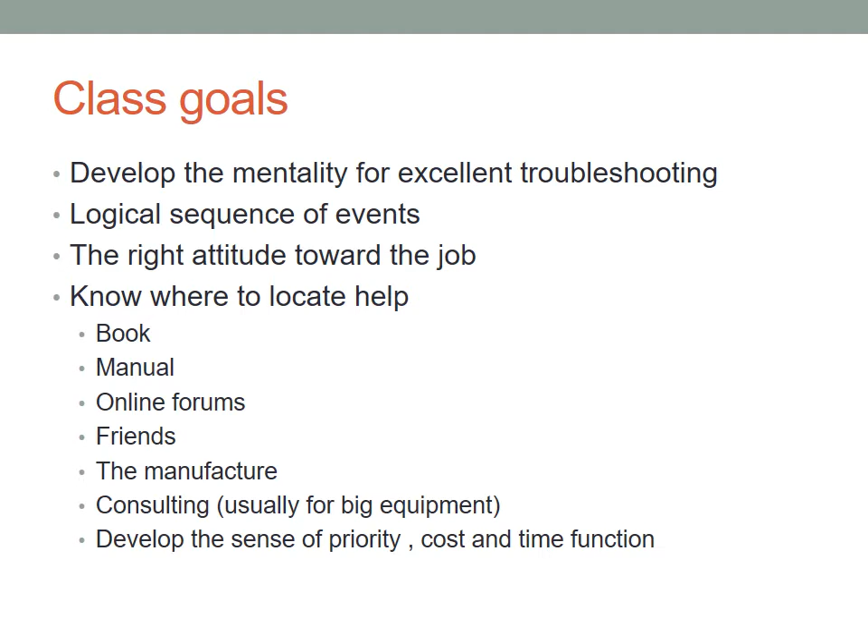Again, we have to develop a sense of priority, cost and time function. Like, do I want to spend the whole day trying to figure out this problem by myself, or do I need to ask somebody, or should I replace the entire thing, or what needs to be replaced? So it's good to develop this kind of skill to know which goes first and how much time I'm going to spend on that boiler and what are the other jobs waiting for me to do.

So troubleshooting. First of all, as you saw in the video I posted on Blackboard, you start with interviewing the customer. What happened, when did the problem start, when was the last time the boiler was running, and so on. The more information you obtain from the customer, the more you will know about the equipment. What is the problem? Did it start? Does it start and stop? Is it giving enough heat? So based on the problem, we can try to zoom in on the problem.

When did it start? When was the last oil delivery? You'll find a lot of problems happen after an oil delivery, and that's because the oil could be not up to specification. There could be a problem with air bubbles in the pump. Was the boiler running while they were filling the tank? That also can lead you to some clues.

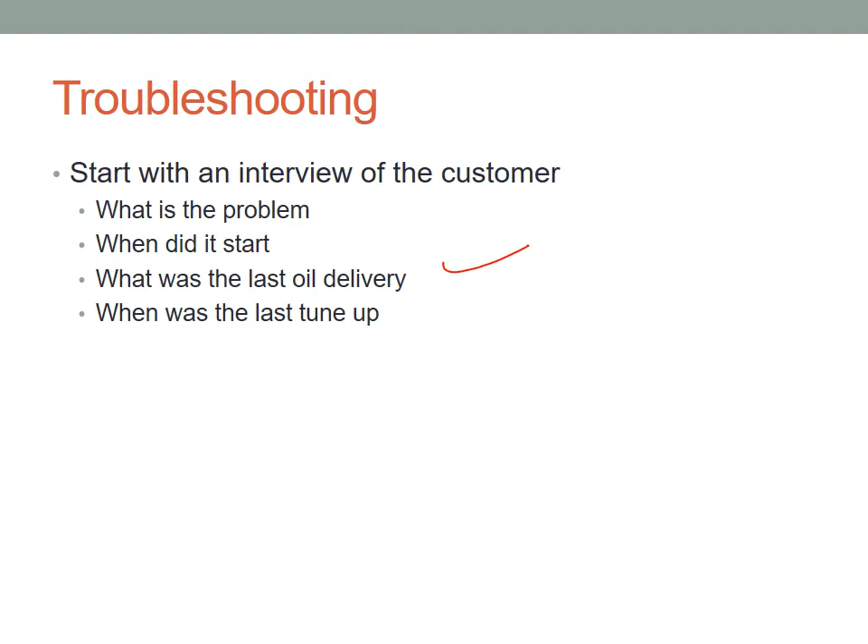When was the last tune-up? Usually there is a checklist next to the boiler that tells you when it was last serviced, what happened to it, what was the combustion efficiency, and so on. So that will be a good piece of information that you want to have before you start troubleshooting. When was the last service call and why? What was the problem? What was changed? And what did we fix?

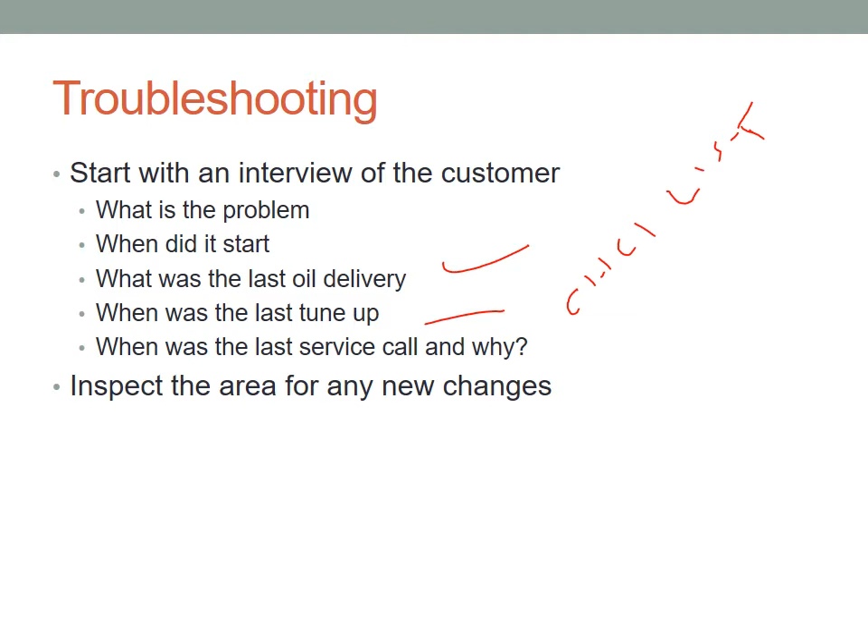Inspect the area for new changes. What happened? Did they put a new boiler there? Did something change? Did they change the laundry, the washing machine and dryer, or put a new opening in the basement? These questions will help you a lot to find what the problem is. Okay, so we'll start with a checkup. So are all the switches on?

So we'll go and check the switches, make sure the emergency switch is on, and we have continuity, and we know how to test continuity. Test the fuse. So is the fuse okay? And again, we can check the fuse for continuity and make sure actually it's connecting.

Then we'll check the thermostat. We can jumper the thermostat and see if the equipment starts or not. And also you can check if the thermostat is responding or not. You can set the temperature high and measure the continuity and see if the thermostat is functioning the way it's supposed to.

Check there's oil in the tank. Many times it will be the simplest things. There is no oil. So check that there's oil in the tank. Check the blower motor door. If it's a forced air system, make sure the blower motor door is closed. Check if it's a hot water system. Check if there's water in the system.

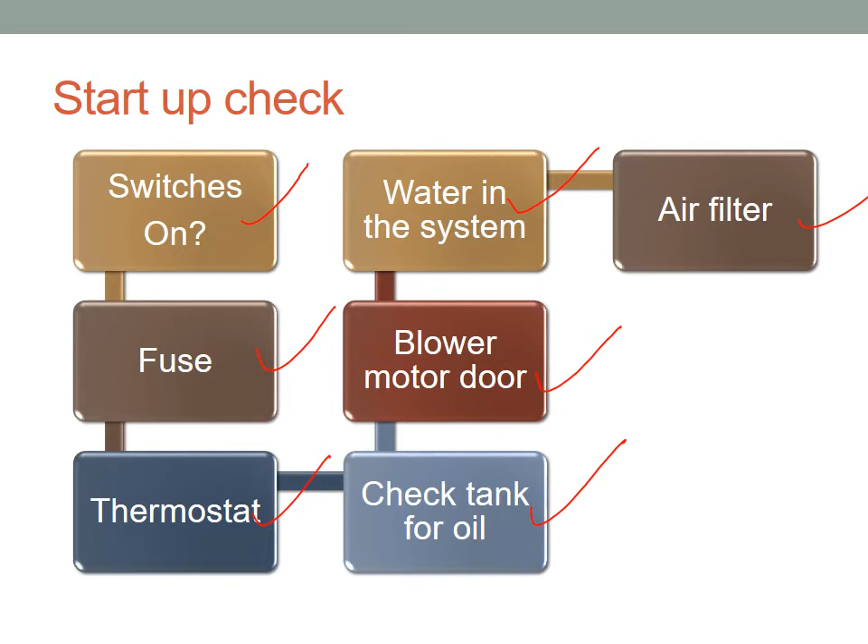If there is no water, there will be air, and if it's air, it's not going to conduct temperature from the boiler all the way to the radiator. And also check the air filter for forced air system in case it's clogged. So this is the basic checkup you can do before you start anything. Check for these things.

Typical problems. So these are some of the most typical problems we can see. First one is no heat at all. I'm getting no heat. The customer turned on the thermostat. There is no heat. It could be not enough heat. It's not heating enough. It's not reaching temperature. The boiler or the furnace is running the whole time and it's not heating.

Or there is too much temperature. It's too hot too quickly. That's another issue we can check and see what's happening. There is no hot water. So if we have an auxiliary water system which is heated by the boiler and we're getting no hot water, we can check the boiler and we can check also the connection between the tank and the boiler.

So check for water leaks. Water leaks are an issue and also a typical problem. So we can go and check and see if the piping is leaking or there is some kind of soldering issue. Check for oil leaks, that's one of the problems. If we have an oil leak, you have to go and check where the oil is coming from. Fix the problem by redoing the piping and also pressure testing the system.

There's odor and smoke. This is very important and it's a very common problem, especially with furnaces and hot air systems, because it means the heat exchanger could be broken. It means that we're mixing combustion air with the circulating air. Also, the thermostat is not responding, or it needs to be reprogrammed, especially with the new thermostats. So these are some of the common problems we can have in our heating system. Okay, moving on.

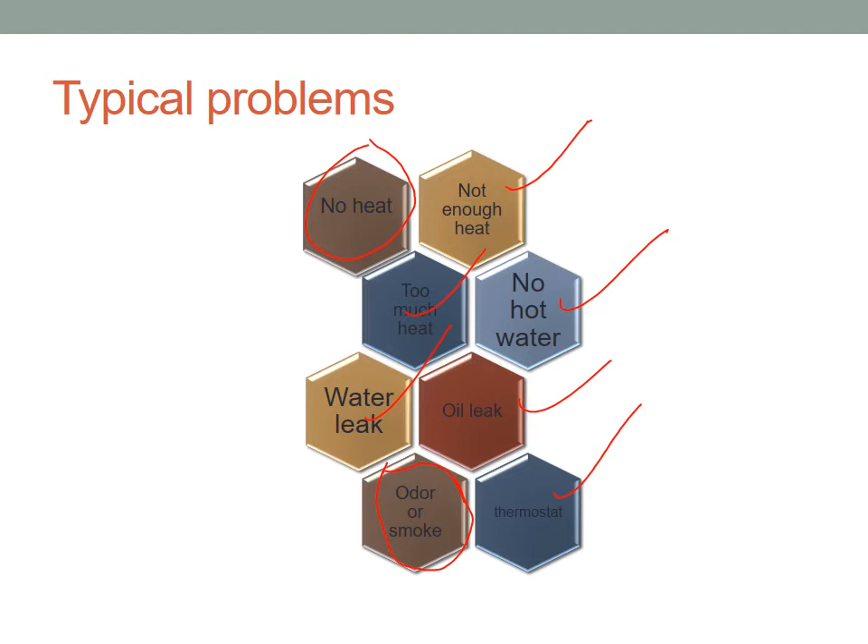Again, the same thing we did when we did wiring of a boiler or a furnace in the lab. We want to locate our equipment. Look for your primary control. Where is it? That's what controls the burner, which is the same as the cad control. If you don't have a primary, if you have a cad control, check for the cad control. Sometimes it could be the aquastat. The aquastat could be controlling the boiler. So check for the primary being aquastat or cad control.

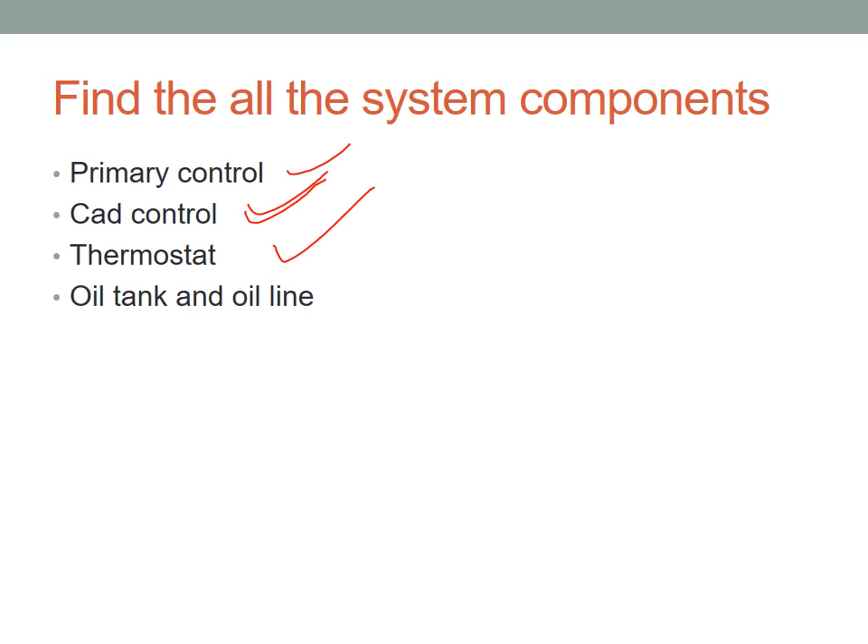Find the thermostat. Where is the thermostat and how is it connected to the boiler? Check the oil in the tank and the oil line and make sure there is some oil. And one way to check that is to run the equipment, turn it on and bleed the pump and see if there's oil running through it. Okay.

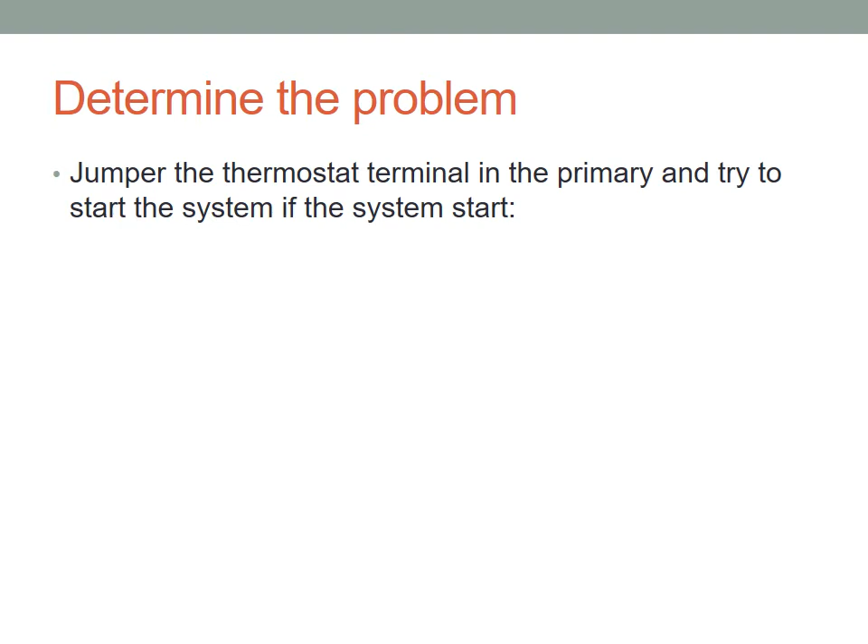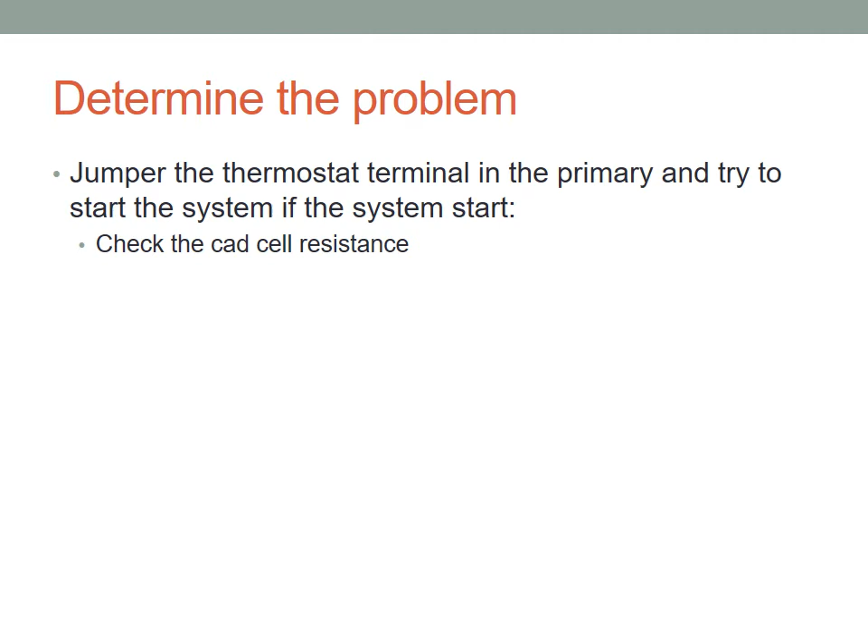Determining the problem. So first of all, if we are saying there is no heat, we can jumper the thermostat, because usually the thermostat is located inside the house and the boiler or the primary is in the basement. So if we jumper the thermostat at the equipment, it should start right away. Check the cad cell resistance. We know how to do that. We can take it out and check that it is the right resistance. It should be above 10,000 in the dark and less than 1,000 in the light.

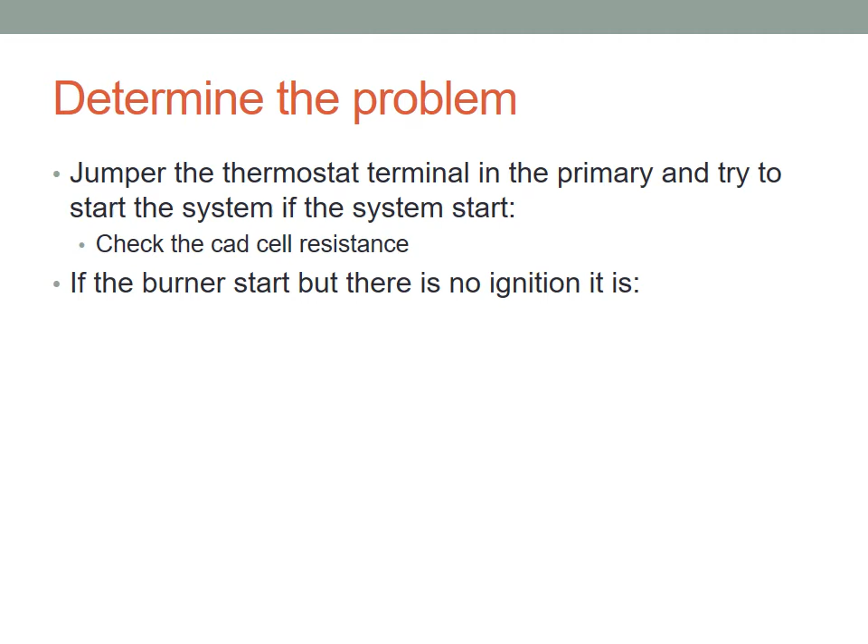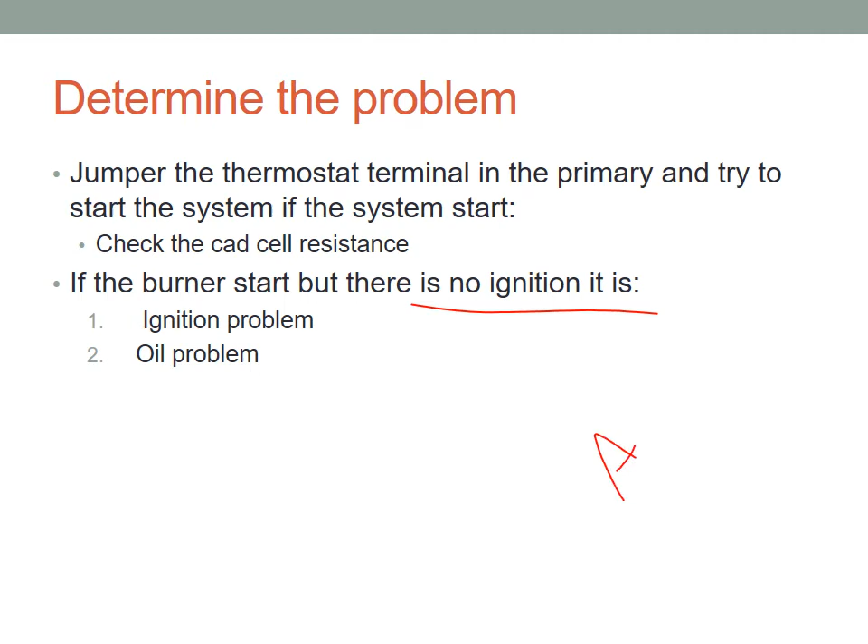If the burner starts when we jumper the thermostat, but there is no ignition, what could be the problem? It could be, of course, an ignition problem, but not necessarily. It could be an oil problem. There's no ignition. That means there's no fire. We say there are three components for fire, which is air plus fuel plus ignition.

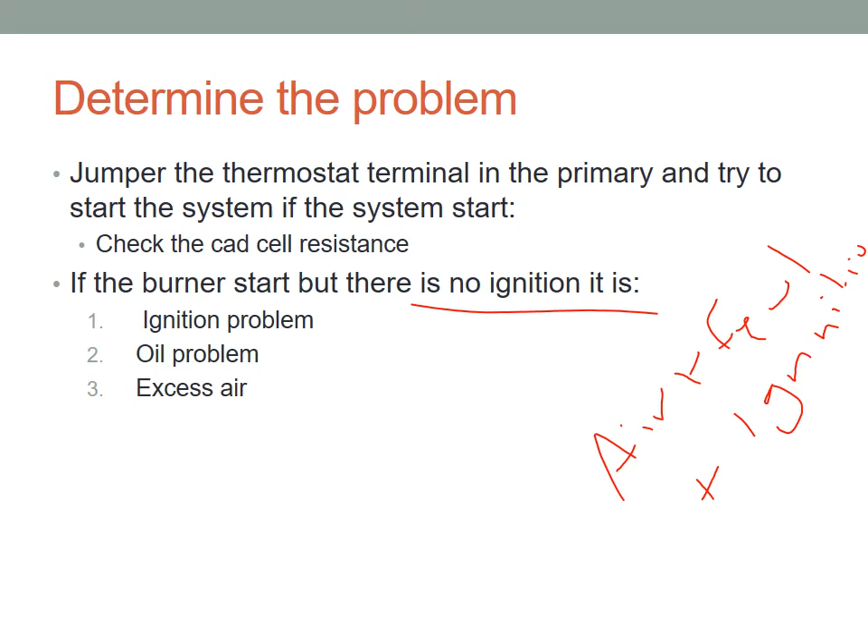So if there's no ignition, no oil, or there's too much air or too little air, one of those things can cause us to have no ignition. So these are three things we can check with the ignition.

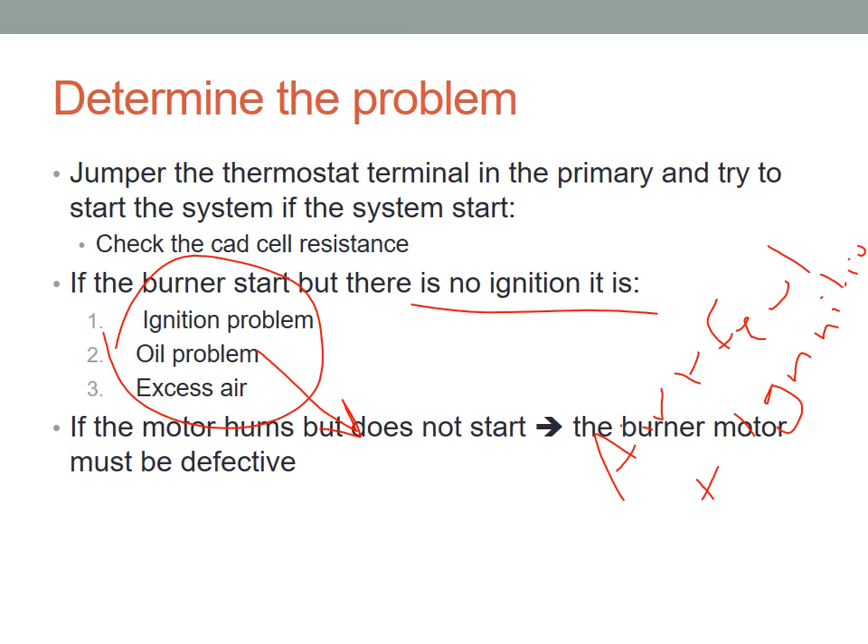Again, we can check the motor. Maybe the motor is not pumping oil, so an oil problem could be related to the motor. So if the motor is humming but it's not starting or not turning, the motor could be defective, or the capacitor and the motor could be defective. So that's something we have to check as we go along.

We have this method that we like to use in troubleshooting called the 5 whys. That means we ask why until we find the problem. So, for example, if we have the control off on safety, we'll ask why. The motor is not turning. Why is it not turning? The pump is seized. Okay, why is the pump seized? Especially if it's not too old. It is full of rust and water.

Okay, that solved the problem, but we should not stop now. We keep going. Why is it full of rust and water? The oil in the tank has water in it. That means there is a problem with excess water in the tank, and that could be solved by fixing the vent pipe and not allowing water to go into the tank. So that's the root cause, which actually led all the way to the control going on safety.

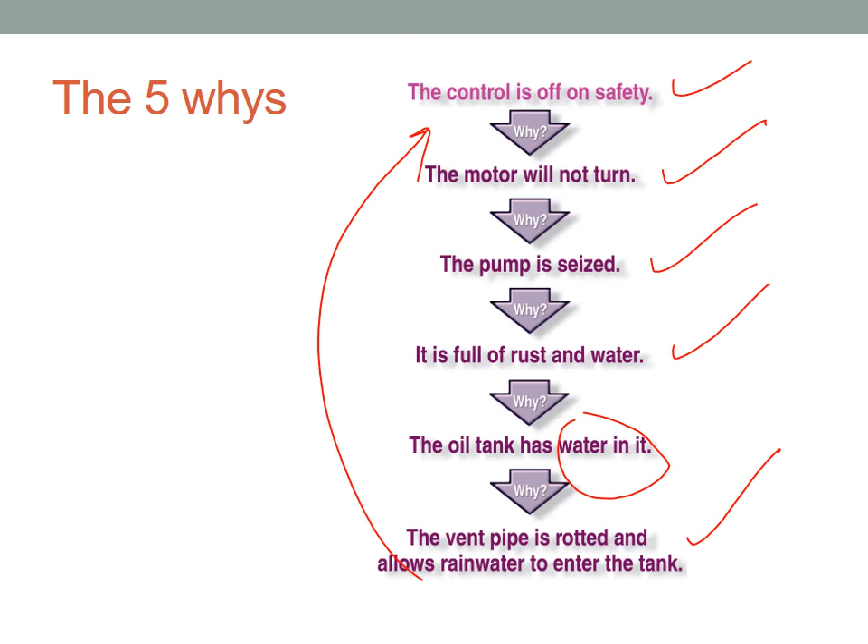So if we just fix the obvious, we might not go to the root cause, and we will risk the repetition of the same problem happening again. Okay, 5 whys, keep asking questions until you find the root cause. Here are some suggestions, although they're not very solid, meaning that it could be some other things, but these could be the obvious things that happen with the heating system.

There is no problem with no solution. Again, we're developing the attitude. So again, it's not magic, it should work. And if there's a problem, there's always a solution that is permanent and will fix the problem long term. Always try to find an answer, especially for the customer. Try to find what the problem was, how it happened.

Saying that this is the way it is, it just broke, doesn't satisfy the customer and makes them feel that they're throwing money where they're not supposed to. And also, it doesn't give you good credibility. Do not accept just because. I mean, do not say, oh, it just breaks. This thing just breaks. That will let the user feel that this equipment is not reliable. So if we don't fix the boiler in a way that will prevent it from not working anymore, that's not a good way to do it.

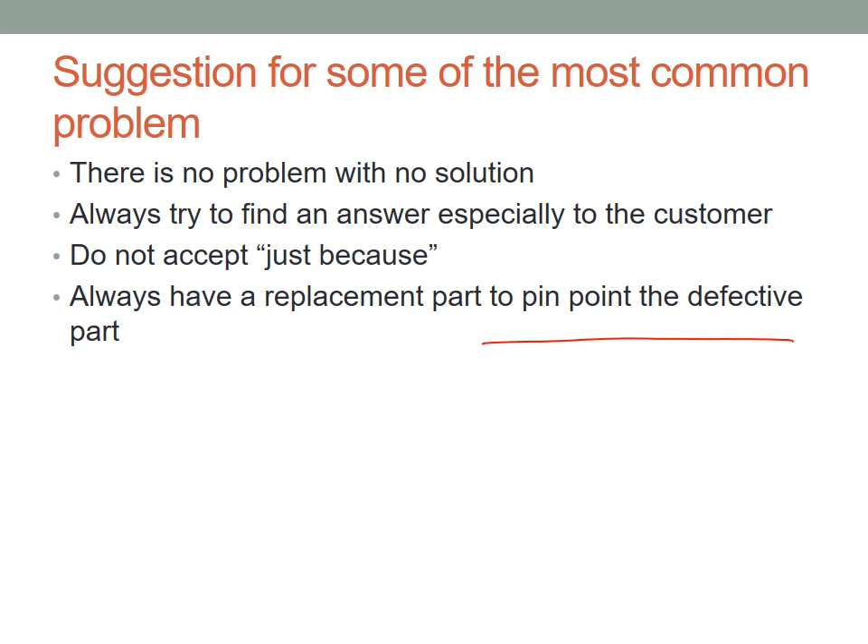Always have a replacement part to pinpoint the defective part. What does that mean? That means we need to have with us another primary control, another aquastat, another thermostat to try to replace and see if that will solve the problem or not. That will make things a little bit easier, which also leads me to the good idea of calling the customer beforehand and getting the model number, or having him send you a picture of the equipment so you can have parts ready with you when you go there, especially with components like a pump or ignition.

Patience is very important. Again, it's very frustrating when you try to troubleshoot. Things just don't usually pan out the way you plan, so try and try again, and eventually it should work. It's challenging, but if you feel like you are not focusing or you're not clear, you should take a break and come back to it again and again. Measure the cost and time and energy that you're going to put into the equipment, and try to size the job correctly.

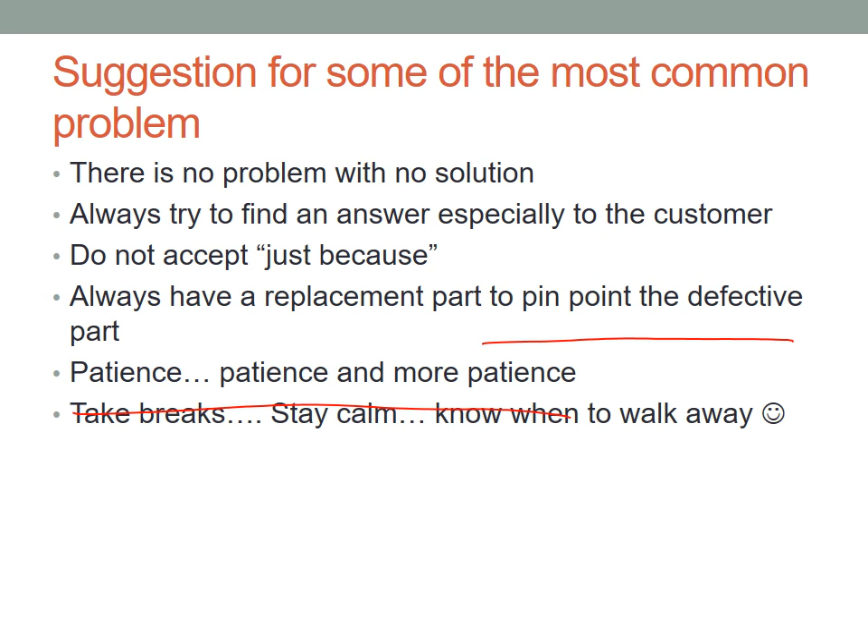Take breaks, stay calm, and know when to walk away or when to ask for help. What do I mean by walk away? If the problem seems to be persistent and it seems to be something you cannot do, you should tell the customer that this is beyond your capabilities and you're going to ask for help, or you're going to call your manager. And why do we do that?

As we try to focus on one thing, usually we get something called tunnel vision, where you look at only one problem. So walking away from the problem and coming back to it later on will help you focus, and will help you get some idea of what was actually happening. Okay, I'll stop now.